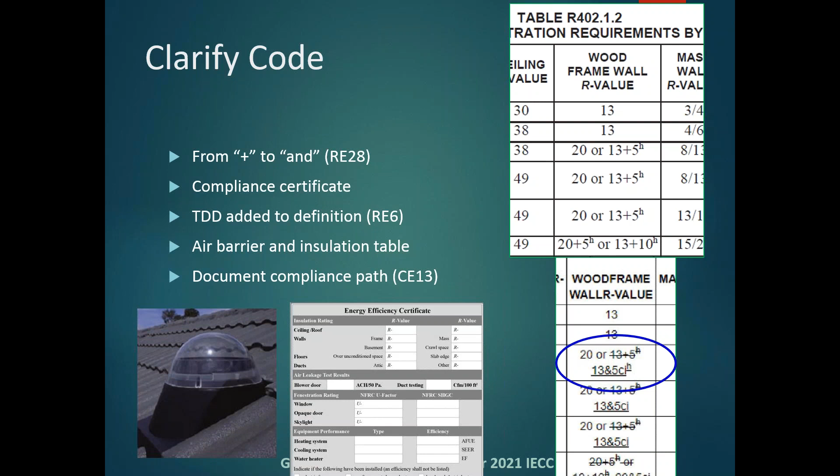If you look at what I call the solar tubes on the side, the tubular daylighting devices, those have always been questionable. How do you qualify that? How does that fit into the energy code? So TDD was added to the definition, and that should help in clarification and for compliance when a home has that product included. Air barrier and insulation table, we've seen that for years.

We had many, many hours of discussion, many proposals on that. Some were approved, many were not. And then document compliance path. This was, there were a few proposals that came in, actually two were passed.

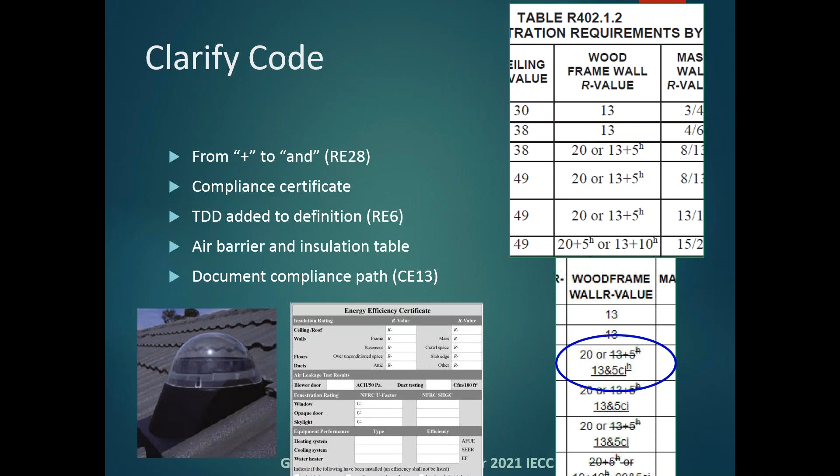This is the one that I liked, where it said the plans are submitted to the building department, and the plans also have to specify which compliance pathway is going to be chosen. So is it the prescriptive path? Is it the trade-off using a res check, the performance, or the ERI path? Because now it's not there.

This is another one that's interesting. If you've looked at the code over the years, you've seen these titles: prescriptive, mandatory. What do they really mean? There's been confusion. Why is this requirement not mandatory? Why is this requirement prescriptive, and so forth?

So the Sustainability and Energy High Performance Code Action Committee, called the SEHPCAC, deliberated over this for a couple of years and looked at it. They said the labels are not enforceable, and it was their understanding that mandatory was meant to intend non-tradable when using a performance compliance option. Where if it was prescriptive, it meant mandatory when using the prescriptive path, but tradable when using the performance path. So now what they've done is they created tables, same thing on commercial.

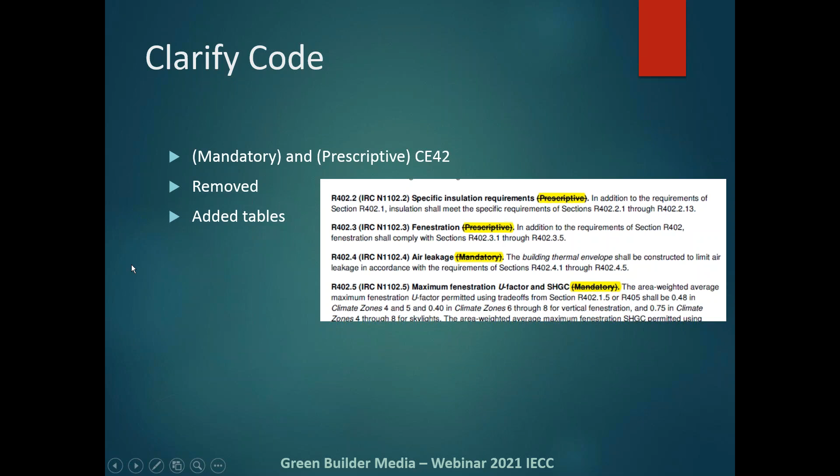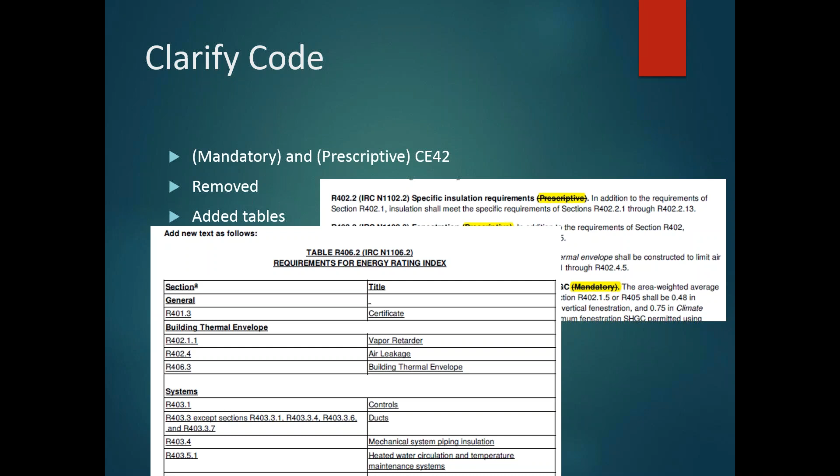Here's an example. So there's a table, and this table here is 406.2, that's the ERI path. There's another comparable table for the performance pathway, which is section R405. And so that does, you're going to follow all the requirements of that pathway. By the way, these are also other mandatory requirements, other sections of the code that you have to comply with when using this other pathway.

Other efficiency requirements included some minor window improvements in warmer climates. For fenestration, there were proposed decreases in fenestration U factors, which were disapproved.

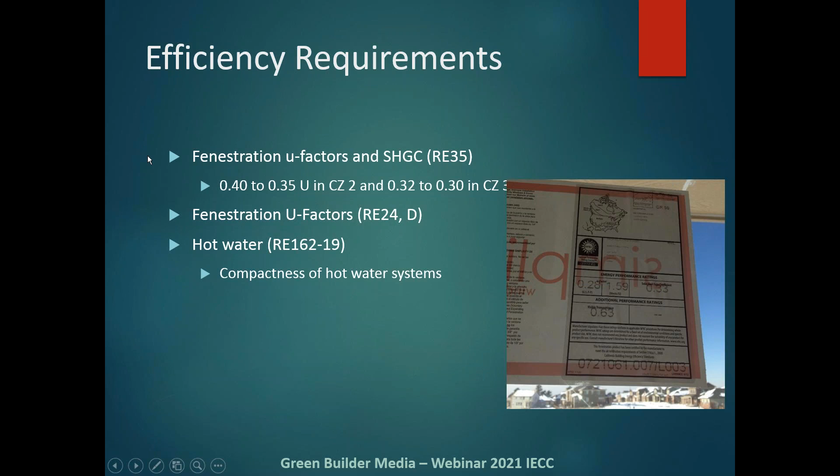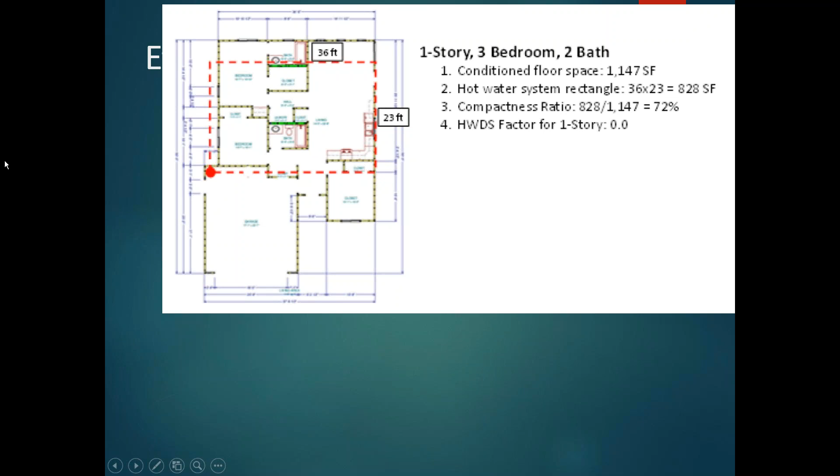Another interesting proposal was on hot water compactness, submitted by Gary Klein, who has submitted many plumbing code change proposals over the years for hot water systems. This only applies to the performance path, because the ERI pathway, think HERS or ResNet, already has hot water requirements built in. This proposal looks at the compactness, the size of the area where hot water pipes reside in the house compared to the overall size of the house. It comes up with a ratio and then a factor that goes into the software. The same software companies that develop performance path software also develop ERI pathway software, which already accounts for hot water distribution savings.

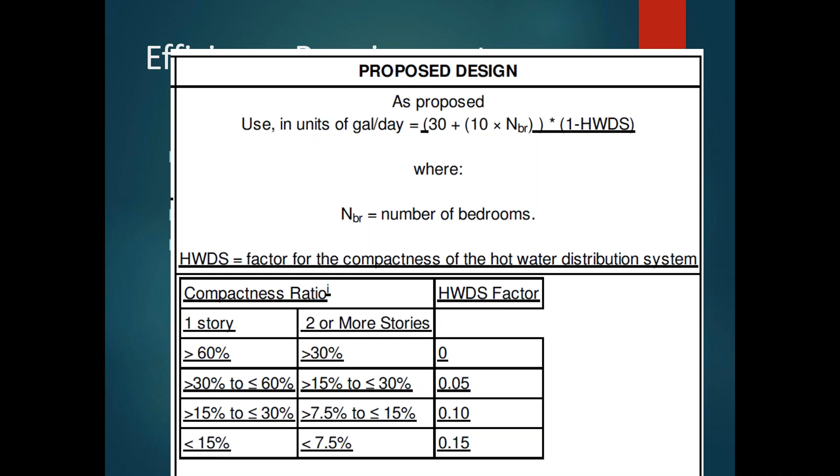This was approved by the committee, and there wasn't a lot of pushback on that one that I remember.

Questions and concerns about this include: is it equivalent? The proponents, including Building Science Corporation who supported this, had some analysis reviewed by PNNL, Pacific Northwest National Laboratory. It is operating right now in Aspen, Colorado, which has this within their code instead of the other performance pathway.

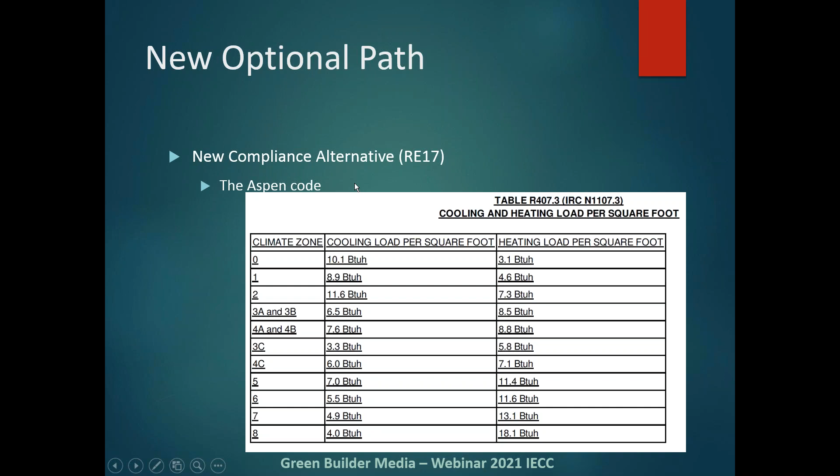Other areas: trade-offs and options. There were a few proposals for mechanical equipment trade-offs, but none of those passed. Mechanical equipment trade-offs came out of the energy code in the 2009 energy code. Since that time, I'd say every code cycle there have been proposals to add back in the equipment trade-offs in the performance pathway, and each year they have not passed.

There's a zero cavity option, which I'll show you - that passed, RE27. So you can put all the insulation on the exterior, none on the interior. That's one that passed.

Another one that passed is wood frame walls. If you're at 24-inch on centers, OVE, this proposal submitted by the National Association of Home Builders said it could be an R18. I didn't vote for this, because when R20 came into the code back in 2009, there was confusion - what's an R20? You couldn't buy an R20 batt back then, though now you can, as some manufacturers are making R20 batts. There's not really an R18 batt out there - there's R19s, and when compressed, each manufacturer has a different R value, some 17.5, 17.6, whatever it may be. You'd have to check with the manufacturer. That was my confusion, but it did pass.

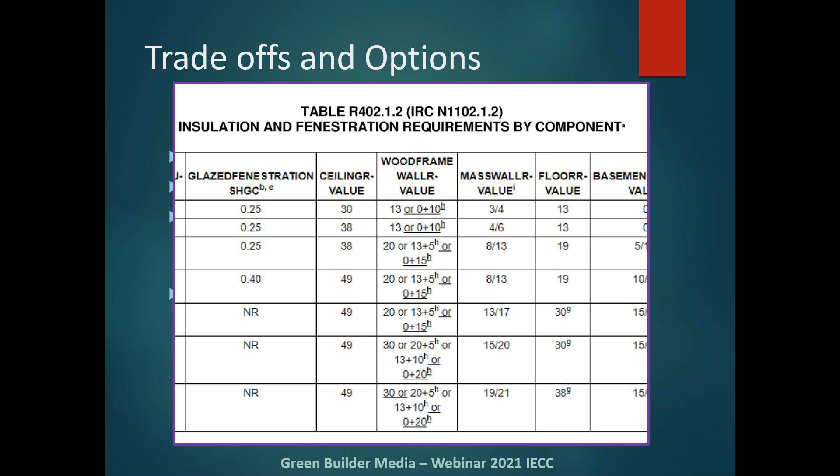Then there are points-based systems - numerous point-based systems to add flexibility to get communities down to zero. What I'm showing here in trade-offs and options is the zero option. As I showed with the cavity, here's a 0 plus 15 - zero cavity, 15 exterior. This proposal was also approved as a cavity-only option. At the bottom of this table are the very cold climates, with a 30 cavity-only option, which you're not going to be building in a 2x6, but it's there in addition to a zero cavity and exterior-insulation-only option.

And then there's a 24-inch on center option, and I'll show a table for that. This proposal, I believe from the Leading Builders of America, proposed options where you'd get credit - you increase your attic insulation, your walls, your windows, and so forth, and you get credit, and you have to reach a certain number of points.

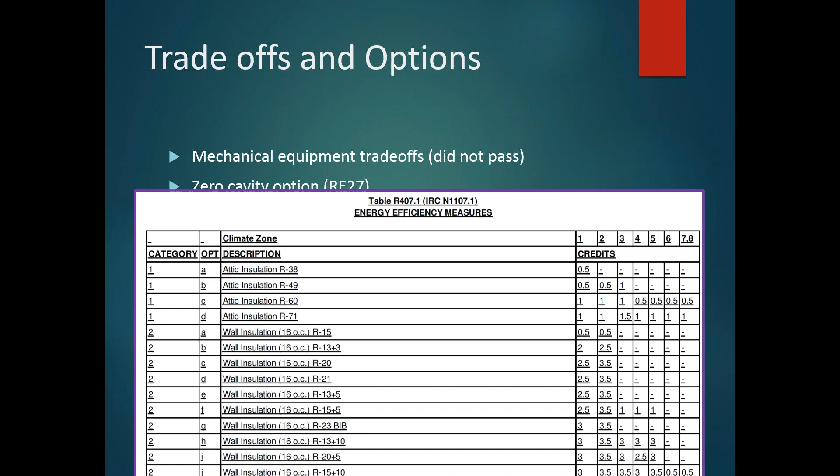There were 3 proposals that had this type of option. None of them passed. This was the Energy Efficient Codes Coalition proposal. There was some similarity, points were different, credits are different, but the other organization, NBI, also had one that would provide flexibility for builders.

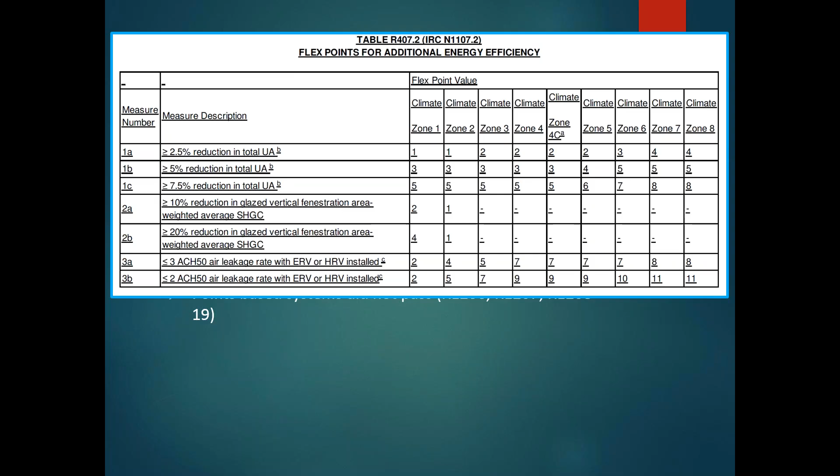Okay, so on the ERI, what's stated right now is that if you use the ERI pathway, you have to have a backstop, and your backstop is the 2009 IECC. So here's the example: if you're going to use the ERI pathway, you have your mandatory requirements, and also your thermal envelope has to at least meet the 2009 IECC.

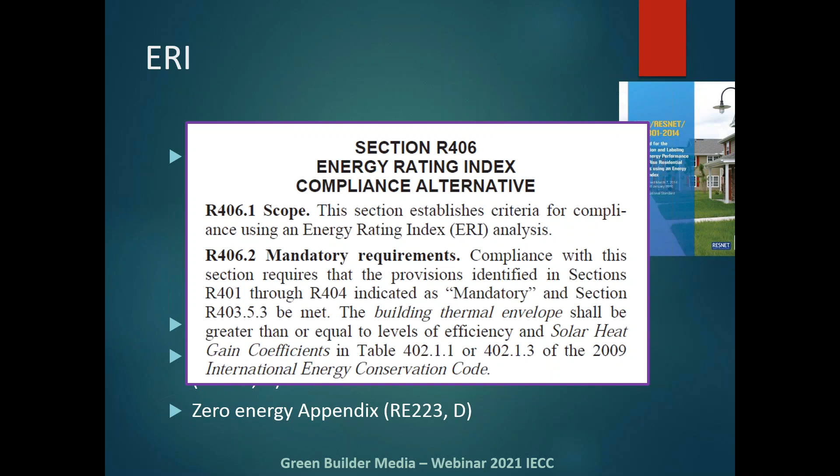This proposal was submitted by the National Association of Home Builders. It said your UA proposed design is based on the 2021 code, then multiplied by 1.15, taking that 15% reduction, which is approximately the difference between the '09 and the '18, and potentially the 2021. So this is strictly a UA proposed versus a firm code requirement. Home builders proposed this because in some climates they don't have as much trade-off in some of the building components, so this would allow additional opportunity for them to use the UA path as a backstop instead of the code.

The opponents came up with a floor modification that added in the solar heat gain coefficient requirements, and then it was approved. So the committee approved it, and the opponents came together on this proposal together.

Other issues on the ERI include documenting ERI compliance at the permit and certificate of occupancy. There's been questions and concerns about how the ERI applies - does it only need to apply at certificate of occupancy, or where?

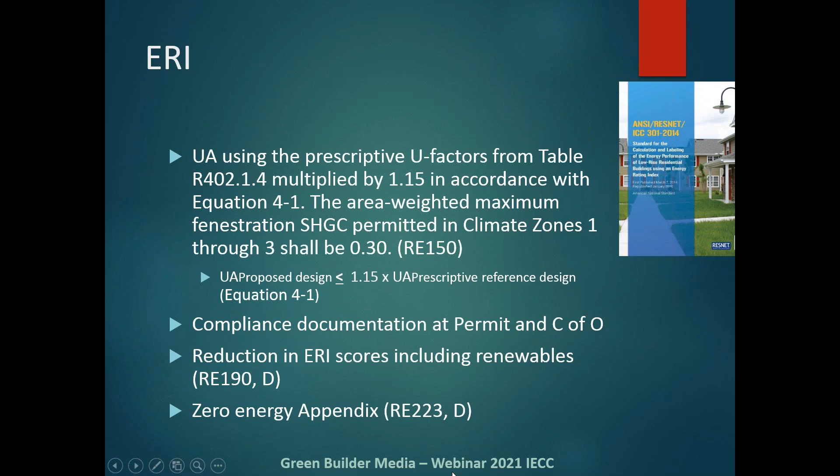There was a proposal for ERI to reduce the ERI scores and include renewables - take the scores lower to make the building more efficient, but then allow renewables. That wasn't passed. I believe those ERI scores lined up with the original ERI proposed scores, and actually came into the 2015 scores. Then the zero energy appendix, which used the ERI pathway, was disapproved.

On leakage, there was air leakage and duct leakage. On air leakage, there's always been this question of how do you do air leakage testing on attached units, small homes, multifamily, and so forth. So this proposal was submitted. Some municipalities across the US are already changing air leakage requirements for multifamily and attached units because of challenges getting that ACH level due to common walls and not enough volume to be effective for the air change per hour.

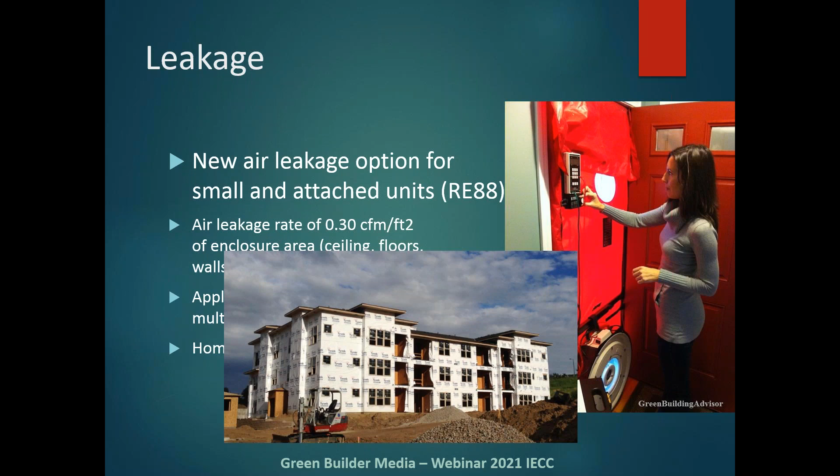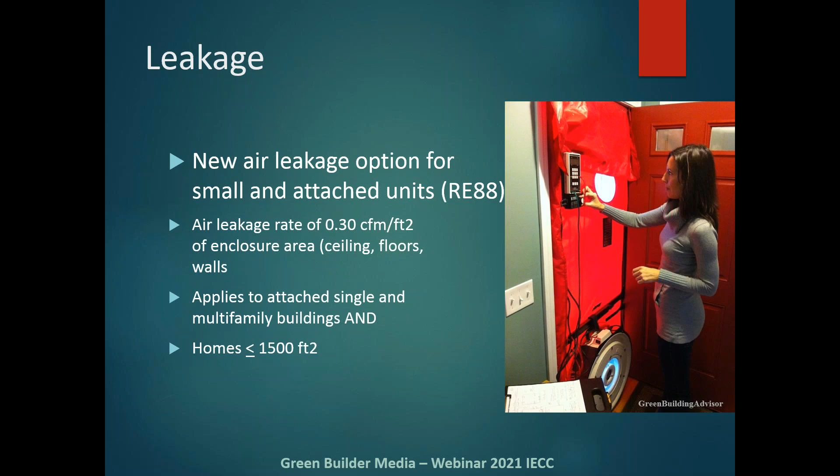So this RE88 would apply to multifamily, attached multifamily row homes, and also small homes - homes less than or equal to 1,500 square feet. As we're seeing smaller homes being constructed and more attached units, this is the pathway that could be used. It would be an air leakage rate of 0.30 CFM per square foot, looking at the enclosure area, not the volume. Energy raters were advocates of that.

For duct leakage, in the code today, duct leakage testing is only required if you're outside conditioned space. In the 2021 code, it was approved by the committee that duct leakage testing would be required with ducts within the building envelope. Also a maximum of 8.0 CFM for those compliance paths - if you think of performance path and ERI path, there's now a limit of 8 CFM, which is fairly leaky, as I think you all understand.

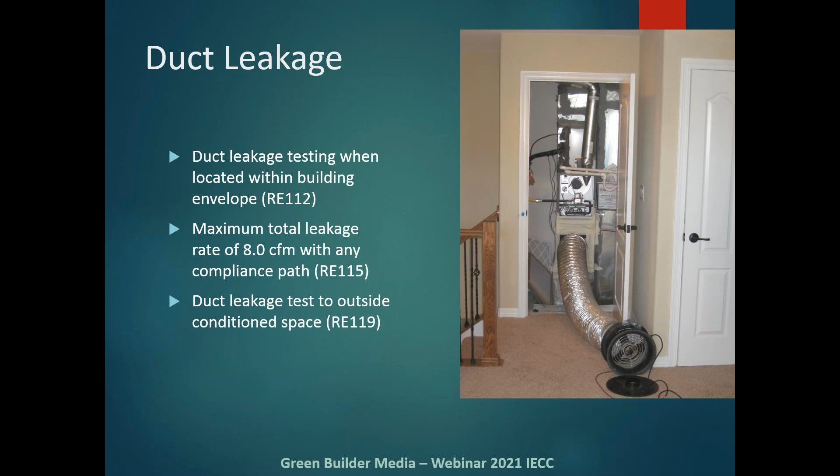So that was included and approved. Duct leakage testing to outdoors was approved - that's been discussed the last few code cycles because it's just been a total duct leakage test. So that's a new opportunity for raters doing that.

On power, energy, and efficiency, there was a lot of discussion about the intent of the code. Should it include renewables? Because the intent of the code today says conservation of energy over the useful life of each building. So there was a lot of discussion - should it be just conservation, should it include energy production, should it include energy benefits? A number of proposals were made, many of those were disapproved. There was also a proposal for limiting the amount of renewable energy production when there's a renewable portfolio standard in a state.

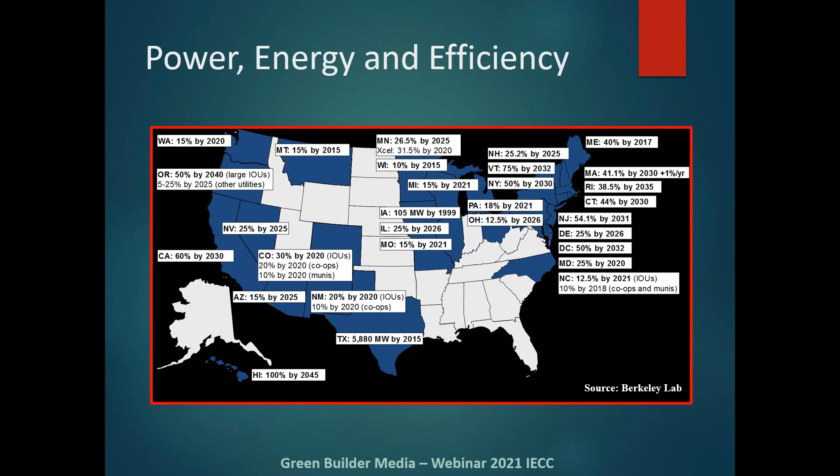So we're seeing many states that are requiring the utilities to have X% of their power generated by renewables. So that was also disapproved. We didn't see this 10 years ago, 9 years ago, but we're seeing it now as the market's changing, as the world's changing around us.

There's that question, and I think it will continue to arise in the 2024 code proposals. So on the compliance certificate, there's a requirement there: if you have renewable energy in your pathway, if you're using the ERI pathway, you have to include the size of your system, your array that was used to show compliance.

There's a solar PV appendix that was approved. It would be Appendix RB if it goes through all the remaining code committee requirements. It doesn't change any backstops or other requirements. It just says if a municipality is going to adopt and make mandatory solar PV, here are the items that you should and need to include with your code adoption. So that was approved as an appendix.

Renewable energy credits - there were proposals to have that requirement into the code. A lot of discussion about that. Should that really reside in the building department's hands? And how appropriate is it? I know that's a discussion. I just had a discussion on this in a city yesterday that's looking at RECs - how do they account for that?

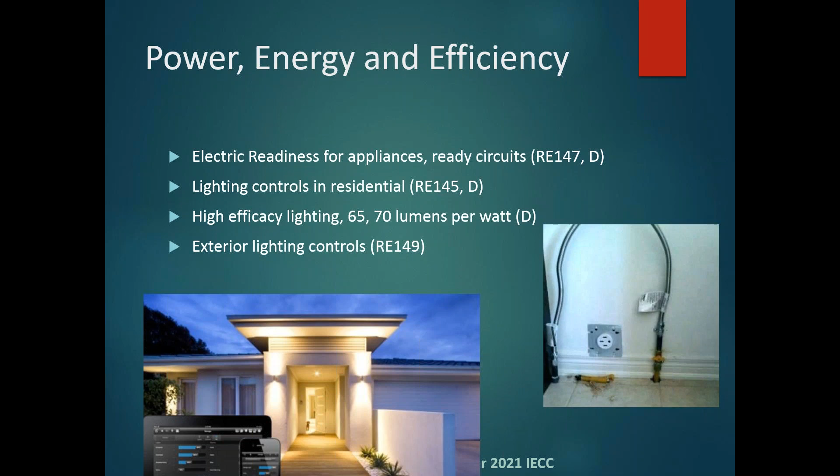That could come back, and that's why I'm sharing this again. High efficacy lighting, increasing that - that did not pass. Exterior lighting controls did pass. And you say, wow, exterior lighting controls for residential? In this case, it would probably mostly apply to multifamily - 3 stories or less, that's where it's going to apply. There's a limit on the amount of watts, so if you exceed that and you have exterior lighting, controls would come into play.

And then zero energy was discussed. The zero energy appendix RB was proposed - that was disapproved. ASHRAE 90.2 was proposed as an appendix for a stretch code. They have lower ERI scores there that are all cost-effective per the ASHRAE cost-effectiveness requirements, and then the points-based systems that I showed previously.

New requirements in tech - there's EV infrastructure requirements that were proposed for commercial and residential. Shaunna could talk about commercial, but on residential, it was disapproved, which would have included EV readiness and EV capable parking spaces for residential.

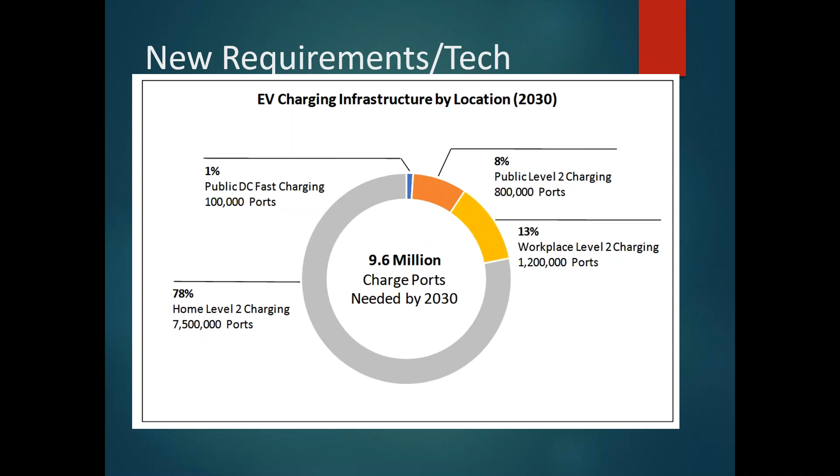And this is just an example. If you look at the lower left, the number from EEI, Edison Electric Institute - this came from one of their reports - shows that by 2030, 78% of all EV charging infrastructure will happen at the home, with 7.5 million ports that they're anticipating by 2030. So we're just a little over 10 years away from that. And then as we see Toyota here, we see GM, Ford, and so forth.

We're all saying they're going all electric. There are a number of vehicles that are coming out by the time this code comes out and will be adopted. These manufacturers are going to have many EVs on the road from where we're at today. So that's just a few years down the road.

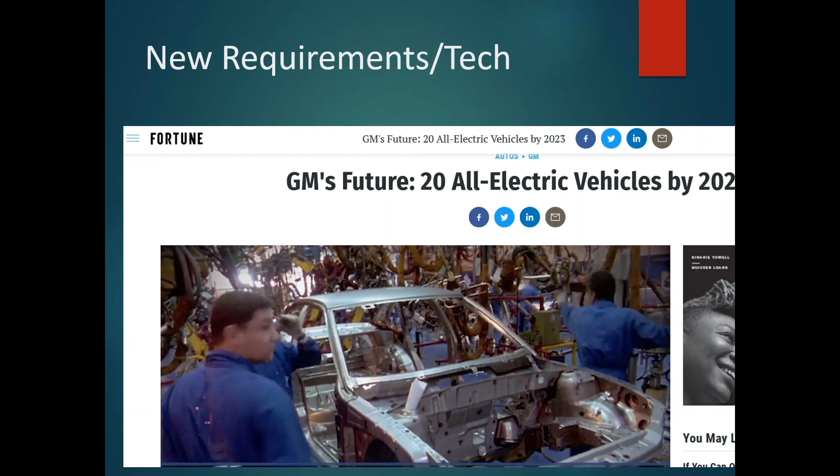And lastly, connected thermostats - that was proposed. Austin Energy is one municipality that has this within their code, and it allows them to support the needs of the network - the grid, the utility network - and also provides flexibility for residents.

So next steps, Shaunna, I'm going into your talk for a few minutes. So here's the next step: public comments, September 23rd, governments - the next voting is only government voting representatives. And then October 23rd through the 30th, everybody come down to Las Vegas and have a party at the ICC public comment hearings.

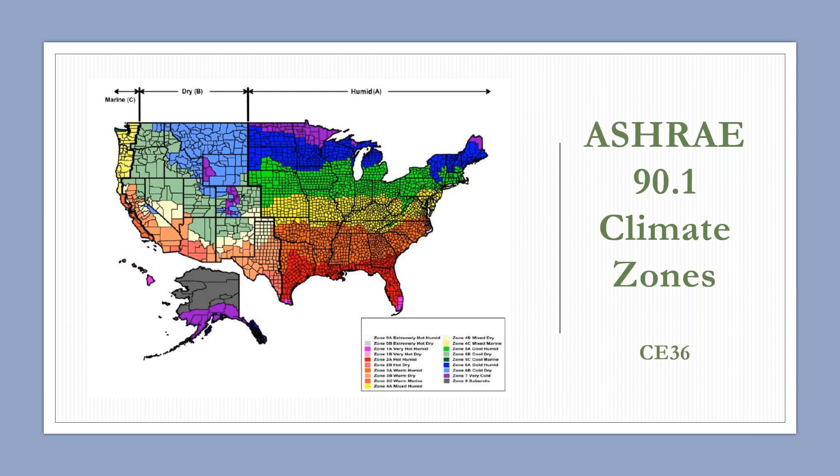First we'll look at ASHRAE 90.1, which had some new climate zones that went in a couple of cycles ago. It didn't make it into the 2018 as proposed, but it did finally make it into the 2021, so that ASHRAE and IECC would have the exact same climate zones. There are a few differences though - there's an addition of climate zone 0, and some readjustments of things as the planet warms up. The climate zones have to change a little bit, so you'll see some changes there. But at least now IECC and ASHRAE will be the same.

As Jim mentioned, the SEHPCAC committee went through and did a big, huge sweep of taking out that word 'mandatory' that you see in the code in parentheses, because it was confusing - isn't the whole code mandatory, right? So instead of seeing the words prescriptive, performance, mandatory, you'll see prescriptive and performance, and all of the requirements are still there. Everything that used to say mandatory is still there, it's just located in those performance paths so that you can't trade out of these types of things. You always had to do them in prescriptive - it was just when you used a trade-off path, maybe people were confusing what they could trade out of and not. So they put this all in a table, just like in residential.

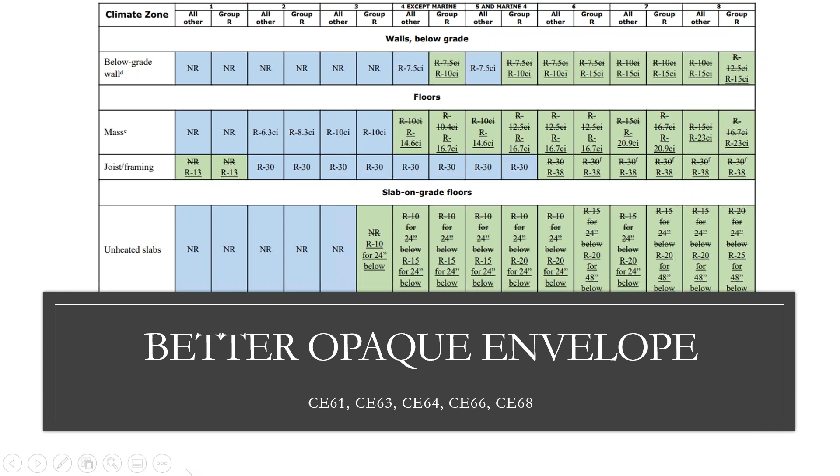There's definitely some better opaque envelope provisions - this is what you see in front of you. I put the code change proposals at the bottom so you could go to the monograph and review the proposals to see which ones made these changes. There were several changes: the below grade wall insulation went to an R10 instead of 7.5 in many climate zones, there was an increase on the mass walls, and the slab insulation increased in many climate zones. You'll see some changes there that passed, and also for the U factors of windows.

A really big change was these U-factors, which was really needed. If you think about a commercial multifamily building, especially if it's 3 stories or less, you'd have to have, in my climate zone 5, a 0.30 to 0.32 depending on which code edition you're on for a window. But if it was commercial, 4 stories or more, you could have a 0.38 to 0.45. So why the difference? The window doesn't know whether it's in a 3-story or 4-story building.

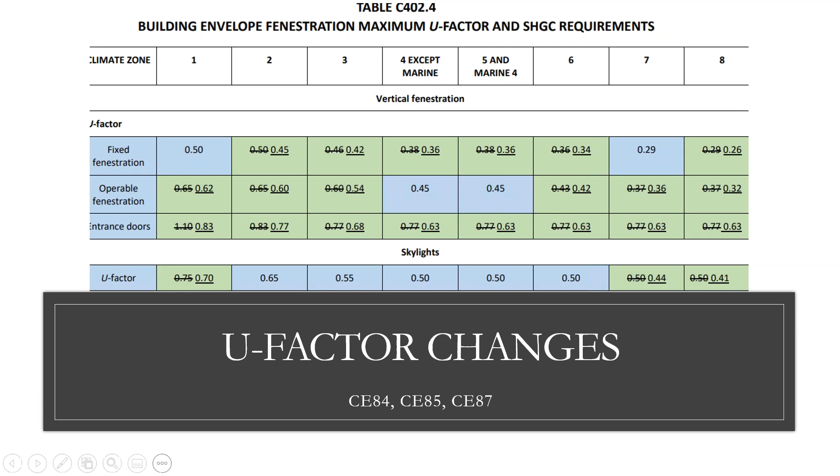So it's about cranking that down to make it more in line with what it should be, same for whether it's operable, fixed, or entrance doors. Those really got brought down to being more in line. I did a lot of research before these went in to make sure these windows were available and weren't going to be a huge increase in cost, and they all seem to be pretty in line with what's already being sold out there.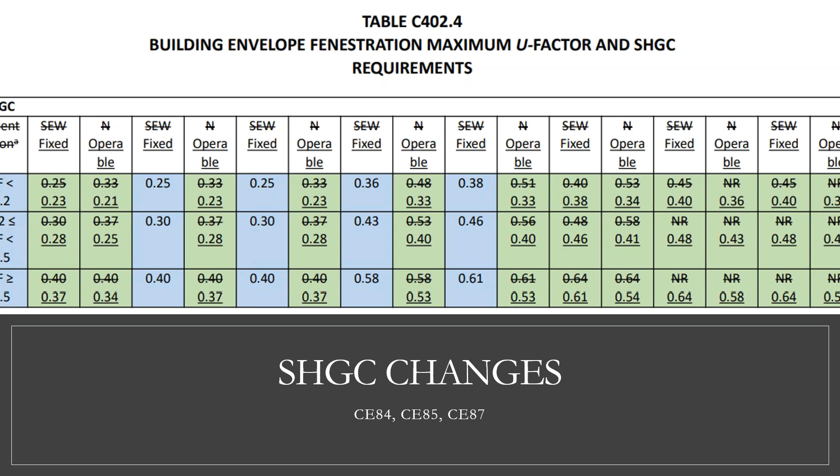SHGC, you're going to see a crank down in solar heat gain coefficient numbers. There were a lot of exhaustive studies done on bringing those numbers down. What is a good solar heat gain number across different climate zones? We've always, in our heating dominated climate zones, not really worried about solar heat gain coefficient as much as, say, air conditioning climate zones like Florida and Puerto Rico, but they're finding more and more that it really does make a difference. The more heat you let into a commercial building, the more the air conditioner has to run to offset that heat. So you'll see a reduction in solar heat gains just about across the board.

The envelope, this came in - the blower door test required. Blower door test required for certain commercial buildings. It's not all, it's certain sizes, but you're going to start seeing it coming in.

They tried to get it into the 2015 code, it didn't pass. They revamped the whole proposal, and it actually passed to get blower door requirements for certain commercial buildings. And then all buildings, pretty much, unless you're in a climate zone that doesn't require air barriers, all air barriers have to get verified by a third party or an approved agency. So you're going to have air barrier commissioning - basically going out there and making sure it was installed everywhere it was supposed to be, plus a requirement for some buildings to also get a blower door test. That's quite new for commercial buildings that people are going to have to get used to.

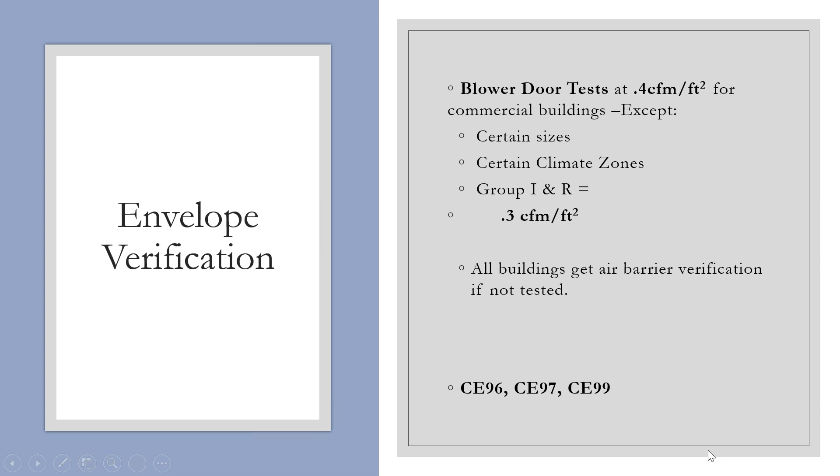More efficient lighting - so for dwelling units, lighting efficiency really increased. We reduced - it didn't pass for residential, but it did pass for commercial - from 45 lumens per watt to 65 lumens per watt for dwelling units. And then, as we do in every code cycle, reducing the efficacies, reducing those lighting power densities using the building area method or the space-by-space method. Just about everything across the board got reduced.

I saw a report put out by NBI not too long ago that showed they estimated the lighting reductions alone to be about a 5% reduction. That's a pretty good jump. And it includes exterior lighting as well, which also received a good dose of reality. The code hadn't caught up with the technologies, so buildings were passing very easily. I hadn't seen an exterior lighting COMcheck pass by less than 50% in some time, just because the technology is better than the code. So you'll see some reductions there.

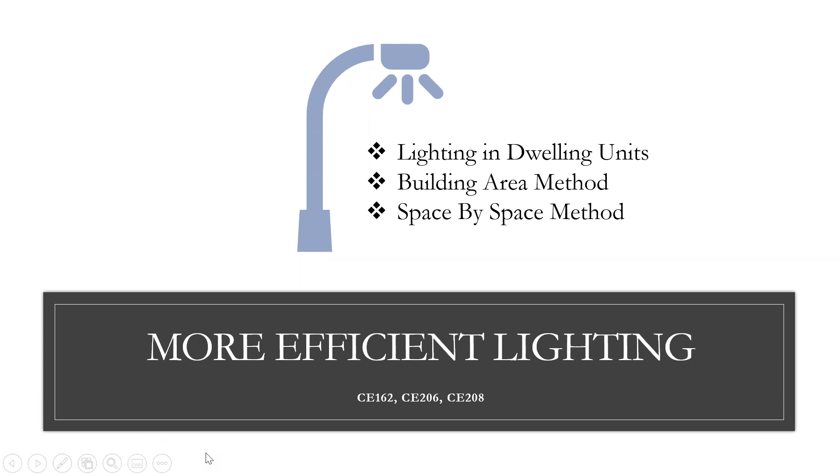This came out a couple cycles ago as we start dealing with grow facilities and what kind of lights they use. The code has always been silent on the requirements for plant growth lighting. And so now, with more and more plant growth lighting for grow facilities, whether medicinal or recreational marijuana, or restaurants trying to buy food grown locally - there's this big push for more locally grown food - you're starting to see these facilities pop up everywhere using lights, and it's really contributing to the energy use in commercial buildings.

So there's some new requirements there - it's about micromoles per joule for plant growth, and we're going to regulate those, not lumens, because lumens are for humans. That's what we use for visual purposes, to see better. So there's some efficacy requirements coming in for lighting for plant growth, which is probably long overdue.

This is one you either love or you hate - controlled receptacles. This has been in ASHRAE 90.1 for a few cycles as a mandatory requirement.

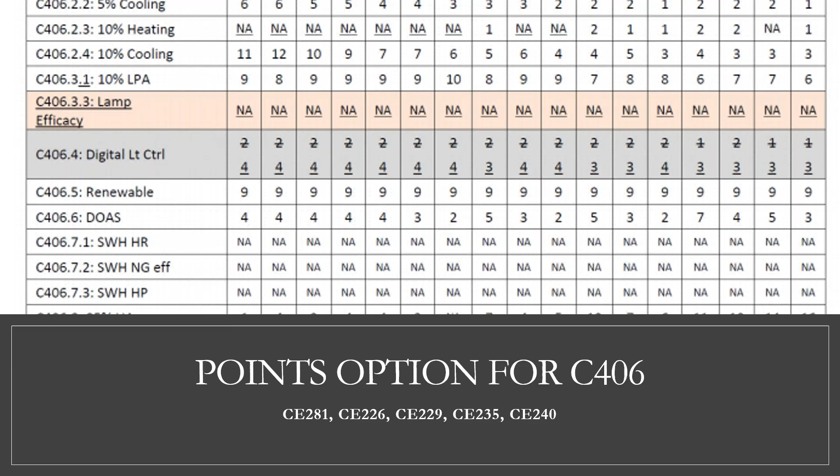Energy monitoring, again, something been in ASHRAE 90.1 for some time as a mandatory requirement, has never been into the energy code or the IECC being brought in. This is to say buildings over 25,000 square feet need to have an energy monitoring system. You have to be able to have the system, and it has to actually do its job. So you have to monitor, record, report. There's some exception for tenant spaces as long as they're on their own utility service and are less than 5,000 square feet of conditioned space. But this is a proposal that's coming in and will definitely be heard again in Las Vegas. Took a few hours to hear that one.

Load shifting is a proposal that didn't pass right away, but I believe will come back. This is just adding verbiage to the intent of the code. There's a lot of proposals adding intent, but this as verbiage that the shift of a load from on-peak period to off-peak has to be considered as an effective use of energy. This was from Sharon Bonesteel, and the committee was a little torn about it, but they gave her some recommendations, so I know that this will come back.

There's also some things in there about intent for renewables. Renewable energy systems and storage systems should be included in the intent. It's becoming critical to integrate energy efficiency measures and renewable measures for future codes. So how do we do that? This one, again, just got disapproved, but the committee gave strong recommendations on how to bring it back. There was more about renewables and energy storage this time than ever before, but it's so new to the code committees and the codes, the IECC anyway, that it's really hard to get it through the first go around or the second go around. Kudos to Joe Kane and all of those that keep bringing it back. Something will get in there eventually.

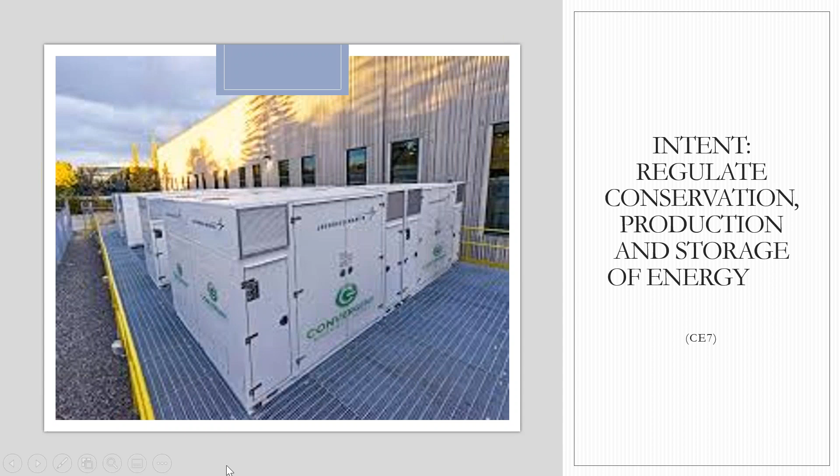Joe Kane also brought an appendix that was very lengthy and involved, and probably overdue. It requires commercial buildings to have PV solar, for jurisdictions that want to require that—here's a way to do it. We've never had that in the code before. Everybody shouldn't reinvent the wheel; Title 24 has been out there a while, people have been doing it, let's learn from them. This very involved, well-written appendix that Joe Kane brought in, the committee considered heavily for hours and determined some changes needed to be made. But we told Joe, please bring it back—people are asking for this, people are needing this—and gave some specifics on how to bring it back. So I'm sure we'll be hearing that again.

EV ready, Jim mentioned this, EV ready versus EV capable. EV capable is basically you have the conduit and a breaker space. EV ready is the conduit, the breaker space, the overcurrent protection, the outlets—it's a little bit more involved. So this is one we're going to hear again in Las Vegas.

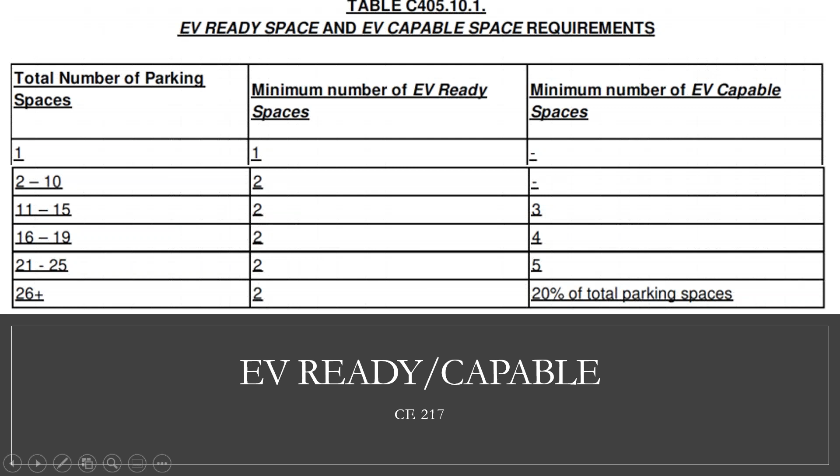Much needed. And then a new option got proposed for the code—it didn't pass, but I know it'll come back in Las Vegas. It's this ZEPI. If you've been around the IECC commercial process for a while, you're used to seeing ZEPI—it's a points-based scale system, almost like an ERI, a score of 100 to 0, with 0 being closer to zero net energy. Some jurisdictions want a path to get to net zero or close to it, so they proposed this as an option—not an appendix, an actual code section, C408, as a way to get there. The hassle is not everybody agrees with ZEPI, or different versions do different things. ZEPI has been in the IGCC 2015, it's been in ASHRAE 189, and since ASHRAE 189 is now taking over most of the IGCC, it will be in the 2018 IGCC, but it's never been in the actual I-code before, and it always gets fought. But we keep hearing they're making changes and making it better, so I'd imagine at some point it'll be an option and get heard again in Las Vegas.

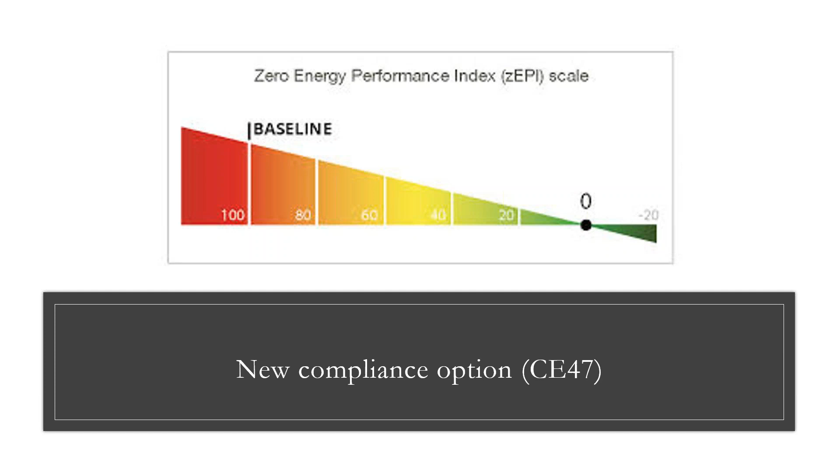So those are the majority of the big changes you're going to see—blower doors, different ways of writing the code, different options. Those are the majority of the changes. It'll be interesting to see how it goes. I always get surprised when we go to the public comment hearing and things get heard again, and you think you know what's going in the code, then it all goes out to online vote, and you get surprised sometimes.